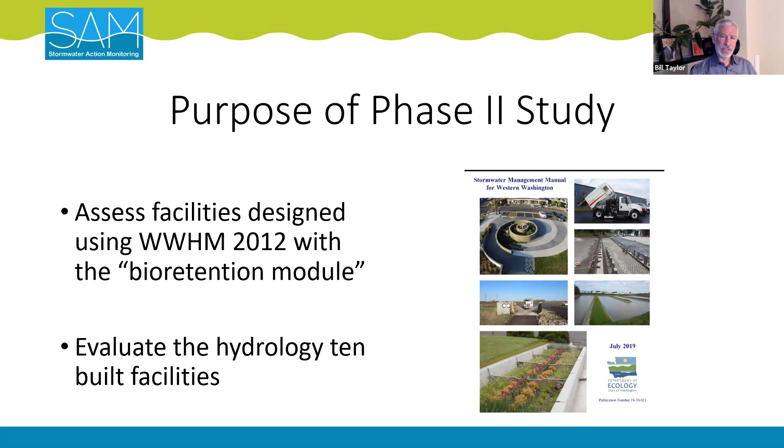The purpose of the Phase Two study is to assess bioretention facilities designed using the Western Washington Hydrology Model of 2012, which includes the bioretention module. We went through a selection process and chose 10 built facilities to measure all of the dimensions and hydrologic conditions in those facilities and compare them to the model. In other words, how well do constructed bioretention facilities perform compared to their design models? And what conditions may be causing differences between actual performance and model performance?

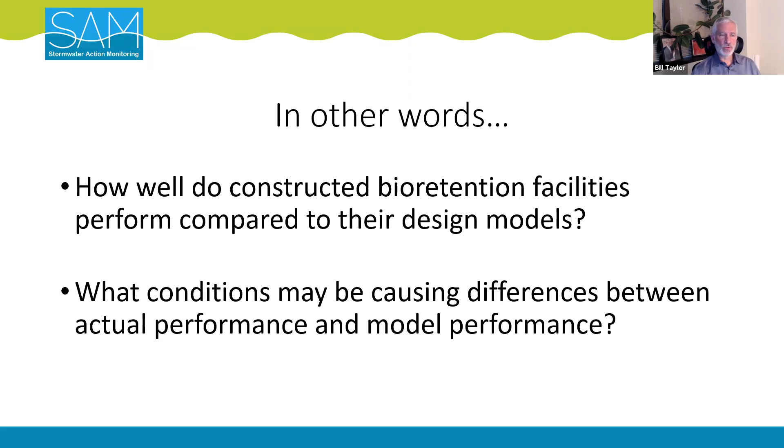In the two phases, there were 10 sites each. In the first set, which by the way was sponsored by the City of Bellingham, those facilities were prior to the use of Western Washington Model 2012, and they're generally a bit older. So they didn't have the benefit of the bioretention module that's in the current version of the Western Washington Hydrology Model. The second 10 were designed using that model, and as a result of being more recently designed, they were quite a bit younger as a group.

Here's a distribution of the sites in this second set, all the way from 2 in Bellingham, 4 in Snohomish County, down into Renton, Tacoma, and outside Olympia in Thurston County. And by the way, that distribution was fairly similar in the first 10. So we have quite a wide range of both climatological and hydrogeologic conditions that we're working across.

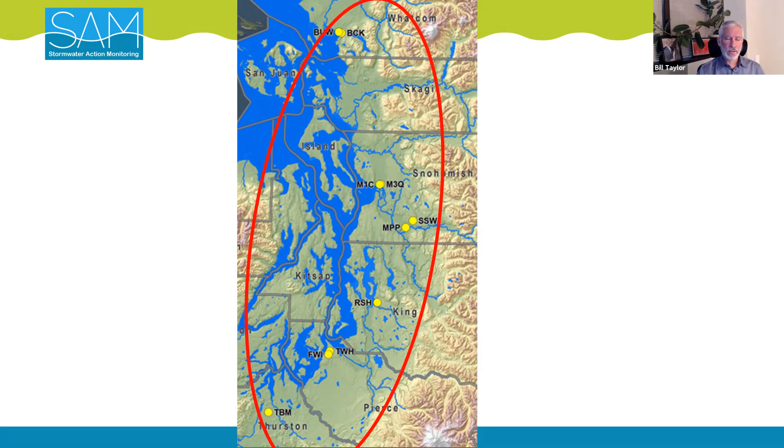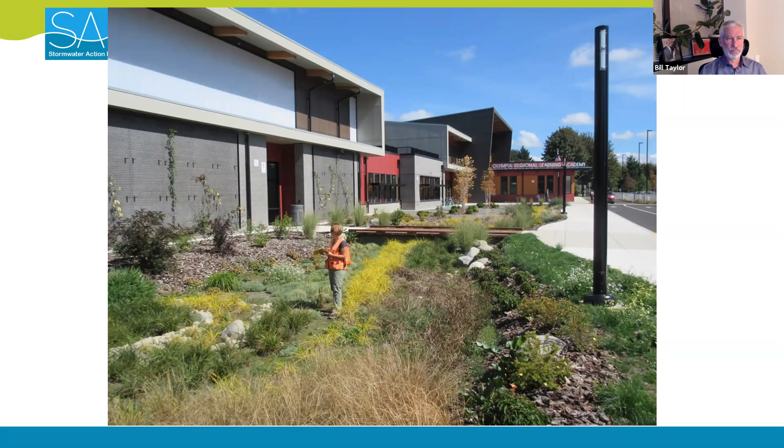I'm going to go through a number of photographs just showing what some of these look like. This is Ann, our landscape architect. Hi, Ann. These first few sites that we'll see are sites from the first 10. And so you can see that they're grown in a bit more. A wide range and selection of plants and different mulching conditions.

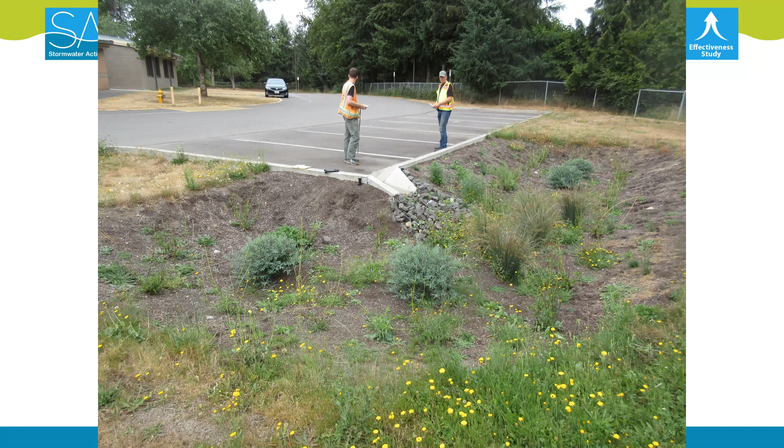Oops. That one looks horrible. I'm having a little trouble with the advance here. I'm not sure what is going on with my cursor. All right, here we go.

So this is another of the current facilities, recently constructed at a school. By the way, schools are a very big user of bioretention facilities. Both in the first 10 that we assessed and the second 10, there were quite a number of facilities fit into the grounds at new public schools.

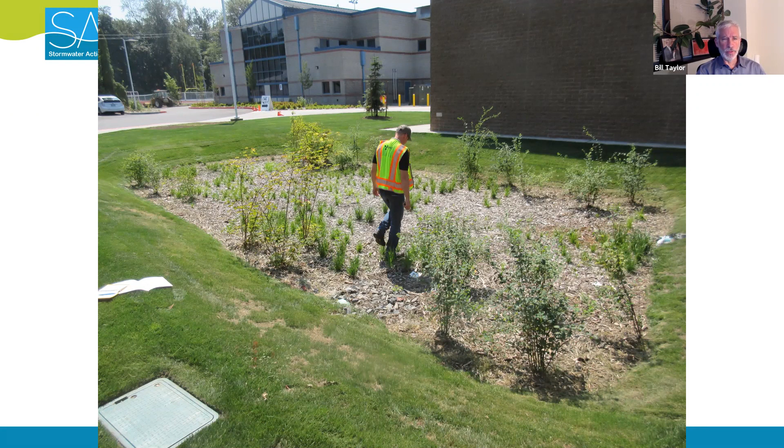Oops, not sure how to better do this. Another one in Monroe. The previous one was, I believe, down outside Tacoma. This is in Monroe. This is also north of Monroe in Snohomish County. We didn't actually select this one, but there's another one behind the building at the same site, and this photo just shows the construction process as they're being built.

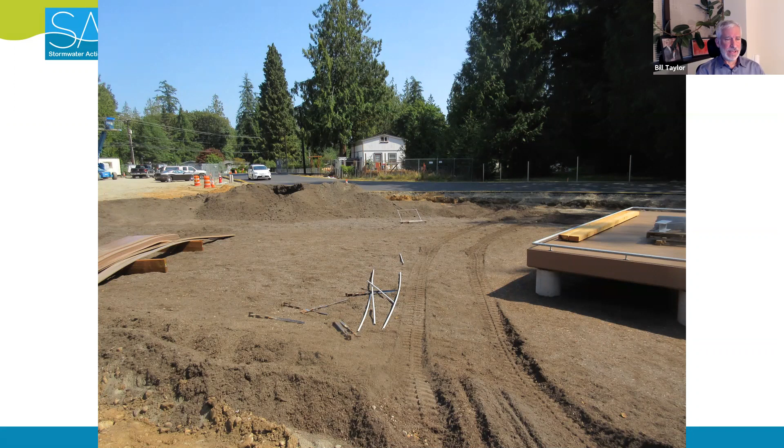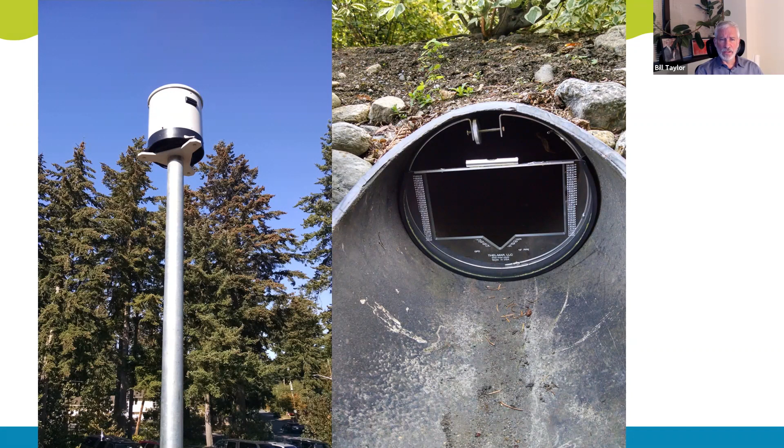Here's an example of the equipment that we're using, a rain gauge, of course, on the left, and compound flow weirs that allow us to measure very low flow rates in the V notch when the flows are low and still get a good signal on the stage, but also allow a higher flow through the rectangular weir when the flows are higher. So that was a very clever way to catch the full range of flows. So we analyzed all of these components for design improvements.

And in the phase 2 site findings, what we found was that 3 of the facilities had smaller bioretention areas than reported, and 6 of the facilities had a small ratio of bioretention area to drainage area.

And when the elevation of the water gets to that point, they're able to measure the entire infiltration area that's active when the water gets to that elevation. So it's a real direct measure of that bioretention area.

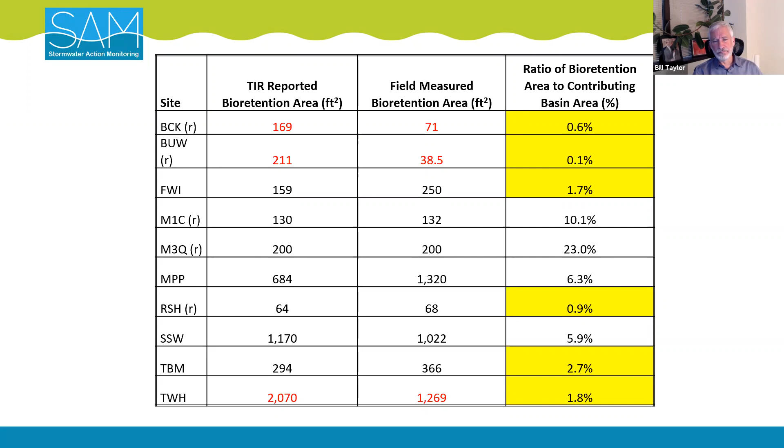Here are the findings from the hydrogeology and geotechnical investigations. Again, the sites covered a wide range of geotechnical and infiltration conditions. The bioretention soil texture was generally coarser than guidelines, both in phase 1 and in phase 2. There's a wide range of infiltration rates, and at times there was little site specific hydrogeologic data, and sometimes borrowed information from other nearby excavations that were not exactly where the cell was going to be constructed.

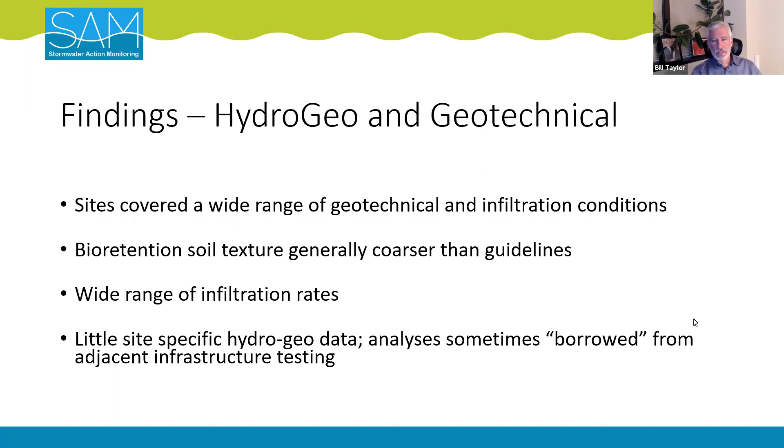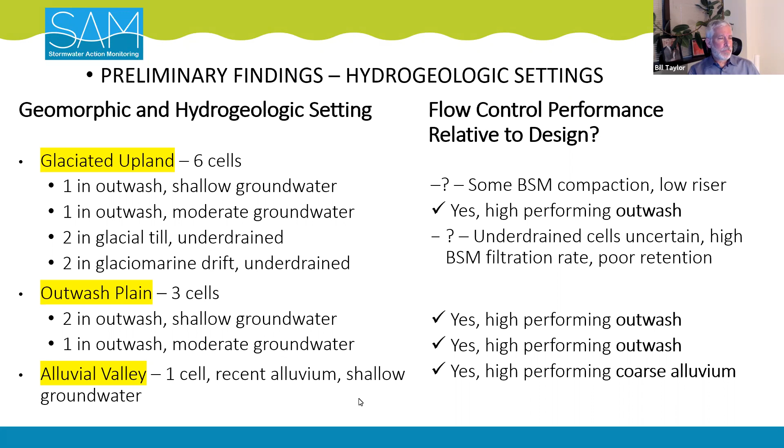And as Jenny has explained to our team, these fine sands and silts are what fill the voids in between the larger particles to help reduce the flow rate and have the biggest effect on infiltration rate through the media. So if you have a lower proportion down in here, that means you have larger potential voids between the media for the water to pass through.

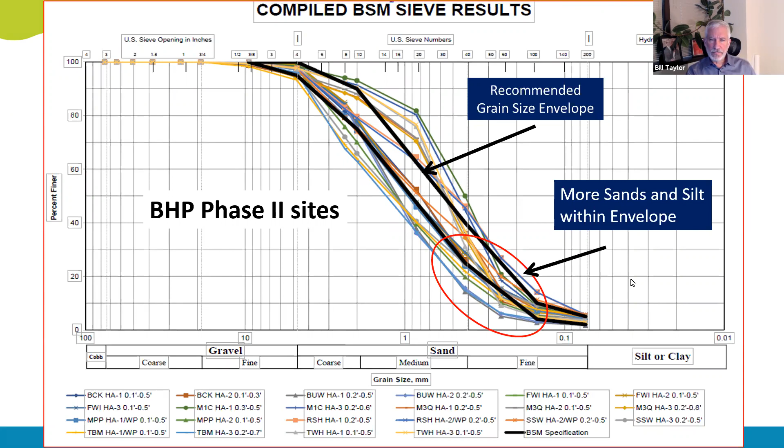In the first set, the older set of facilities, it was pretty consistent that they were all outside this range of the envelope. With the new set, it was a little bit closer. There were a few more in that range, but again, a number of them were outside that sands and silty range.

So for you engineers and other hydrogeologists, this starts to get very conceptual below the ground, but you start to see that there's a little bit of consistency in some of them, but some of them are quite different. That's one of the main findings that we're seeing in the engineers' design reports compared to what we're seeing in the field.

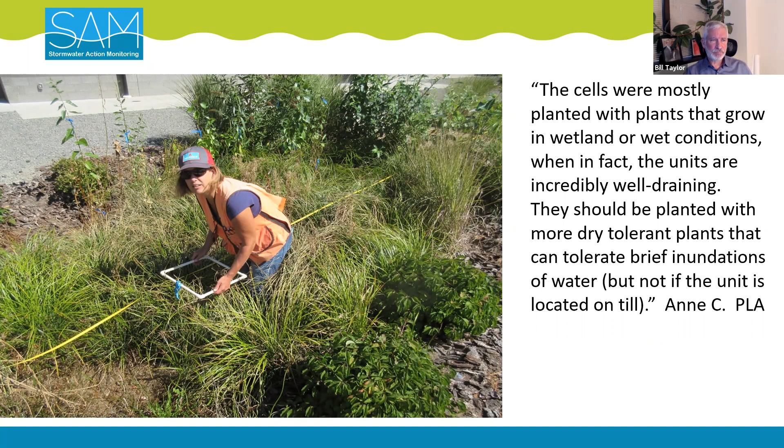In my discussions with some of the facility owners, it's clear that post-construction maintenance of these facilities is their biggest concern. They leave the design of the things to the engineers and the contractors to build it. But then once they move in, they own it, and they have a considerable challenge in maintaining the plant community based on how dry it gets. Never mind the maintenance staff that needs to do it.

So for the vegetation, shrub species were surviving well, the herbaceous species less so because they depend on more irrigation. Their root system is shallower, so they need that near surface water. Selecting fewer, more successful species will lead to greater survival and reduced plant and maintenance costs. And there are recurring issues of plant die-off, invasive species, replanting, and lack of maintenance staff capacity.

One of the other interesting results that we observed, even more so in the second set, is that when the water flows into the facility, because the bioretention soil is so highly infiltrating, a lot of the infiltration happens before it ever progresses across the cell itself. So it's very uneven. And plants that are closer to the inflow will receive more water, and plants farther away will remain drier.

Actually, in one of the other sites that we looked at in the first 10, it had a considerable effect on the infiltration of water through the bioretention soil media and getting to the underdrain quickly, which essentially caused a bypassing of the distribution across all of the soil media.

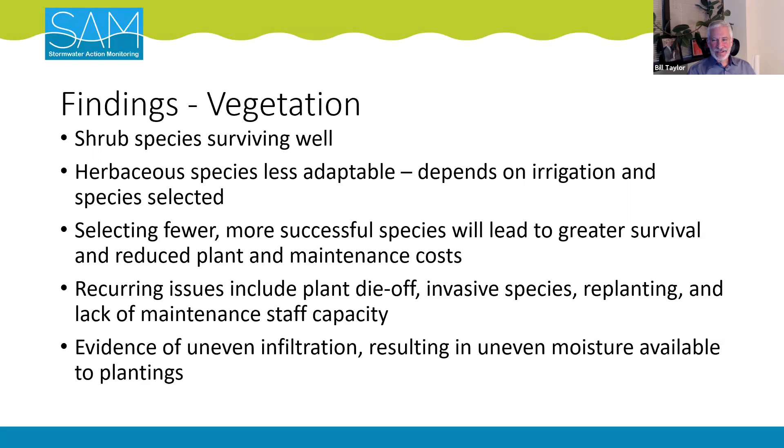Thanks for breaking the ice, Shanti. Sure, happy to help. Okay, oh, I see, interesting. Little detail on Zoom, if you have more than one screen, your scrolling mouse doesn't work unless your cursor is on the screen that you're wanting to scroll.

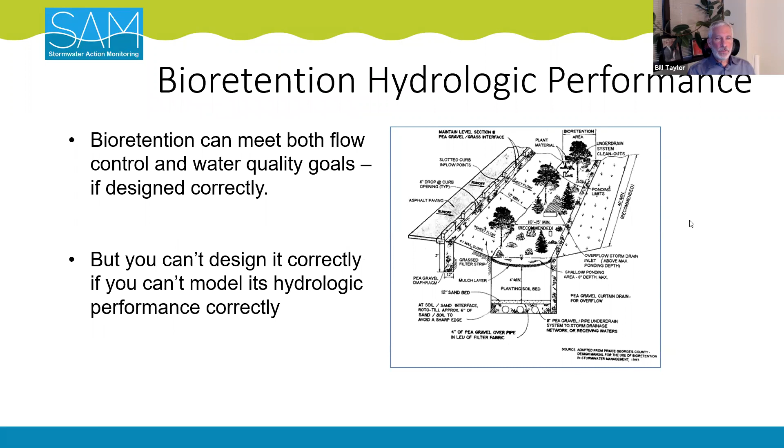So we're getting into Doug's work that he did, and everyone should know Doug. He's the author of the Western Washington Hydrology Model that's used through the Department of Ecology. In the first set, I'm looking at the phase one site designs. In the first set, they did not have the benefit of the bioretention module.

And so they had to essentially design a makeshift trench or some other kind of fake bioretention model in the model. And there were some other models entirely that were used for design, but they didn't have that multi-layer bioretention module that's presently available. The approach to modeling was often not set up properly. And for that first set of facilities, none of which were retrofits, the hydrologic performance of the facilities was more due to oversizing facilities for 100% infiltration, masking any design errors or incorrect assumptions.

So essentially, there was very little observable response that we could see in the range where the facility would start to, for example, fill up considerably or even overflow. I don't believe we had any overflows in the first sets. So the oversizing essentially didn't allow for a lot of response in the facility to evaluate much.

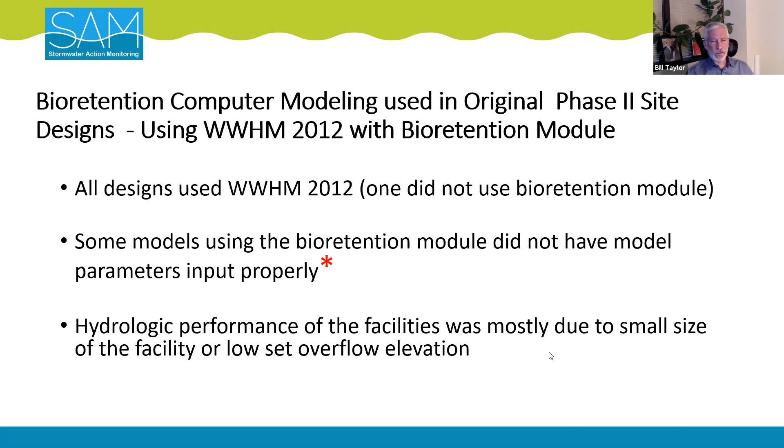So here's for the engineers. We had a request after the first presentation of this in the North Sound permittees group that actually some of the engineers wished they had attended, and they wanted to know more about what the engineers need to be doing better to be more accurate in the modeling. Some of these are pretty obvious, but it just shows that for you permit application reviewers, these are some of the things that you really need to be looking for.

The construction plan should match the design documents, which should match the bioretention model inputs. These are just numeric consistency between the various design documents. The model drainage area and the bioretention areas should match the actual areas. So it's very important to know what your contributing drainage area is, because just to begin with, that's the source of your water. And if you don't have the source of your water right going into the rest of your system, who knows what it's going to do. So just the first steps of the inputs need to be accurate.

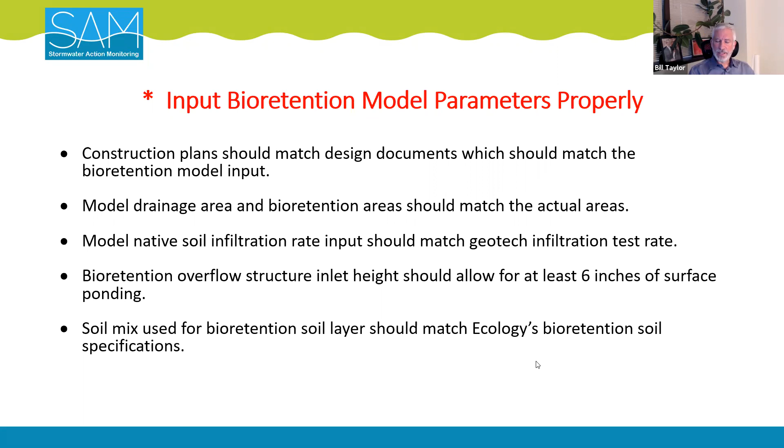In the summary of the model results, WWHM 2012 fairly accurately mimicked what was measured in the field. But Doug recommends adding a vegetative litter when there's going to be some finer material on the surface of the bioretention media, and also to increase evapotranspiration from the bioretention soil mix. So this is getting a little bit into the technical details of the model itself, but it's of interest to the engineers to help model it more accurately.

Recommendations from the BHP Phase Two. Again, maintain a bioretention top area of at least 5% of the drainage area. Maintain a minimum 6-inch riser height. Maintain a minimum of 18-inch bioretention soil mix and meet the size distribution criteria. And specify a planting plan that reflects the relatively dry and well-drained conditions of bioretention facilities.

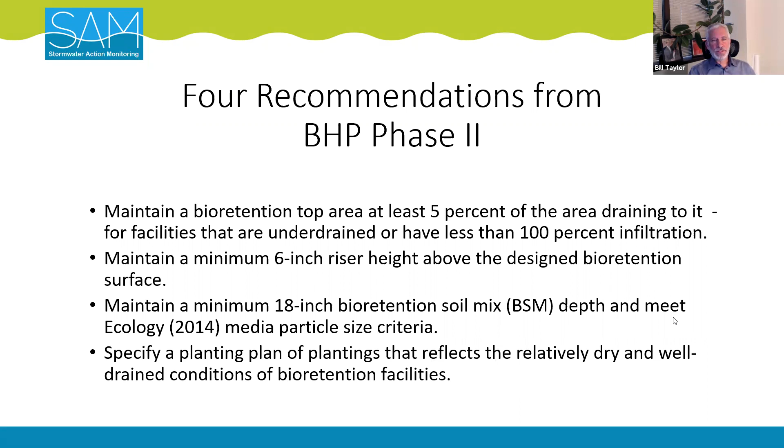So there is our presentation for today, and one of our facilities in the middle of summer with our crew actively collecting the data. So please reflect back on what we've got here and ask us some questions.

Doug, you want to comment more on the model setup? We've been talking about that a little bit between the expected infiltration rates and how it's set up with your new bioretention module. Sure. I think there's a lot of input involved with the modeling of a bioretention facility, and some of it's a bit confusing. So I think it's important that if you're the design engineer or even the reviewer looking at what all this stuff means, there's a lot of documentation available in the WWHM 2012 user manual. So that's a good resource for people when they want to better understand exactly how this whole thing works with bioretention and how to properly set up the model. So that is certainly a good place to start.

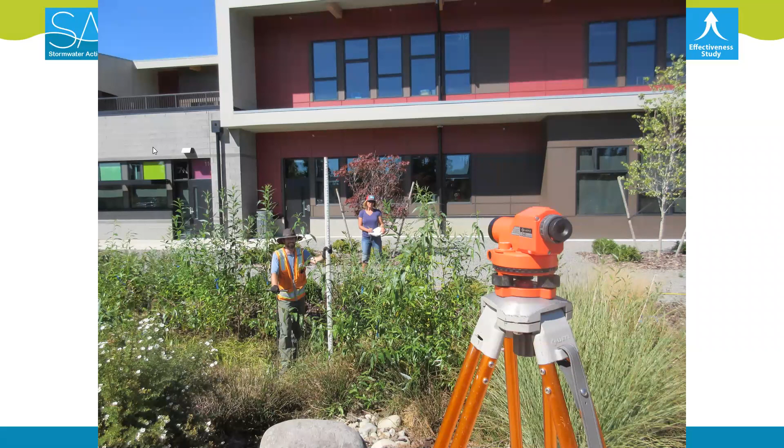Thank you. And I'm seeing a couple of questions. Chris Berg, will you have a successful plant list available? And you want to talk about that for a moment? Yeah, I can talk about that. Unfortunately, we more developed an unsuccessful plant list in reviewing the facilities as opposed to what exactly works. It was easier to say what exactly isn't working. I know that shrubs tend to have a much better survival than a lot of the herbaceous vegetation. I realize shrubs sometimes can be big and cause sightline problems, so they're not a perfect fit for every bioretention unit, but they did measure as having a greater survival compared to a lot of the herbaceous stuff.

And then there's a measurement used for plants when you're doing wetland work, and it's called a wetland indicator status. So for your herbaceous plants, you want to tend towards the drier side, maybe a facultative or a facultative upland rating on the wetland indicator status, as opposed to the obligate rating that many of the plants installed in these facilities have. An obligate rating means essentially they occur 99% of the time in wetlands. So you want to trend towards more of a plant that would only occur maybe 50% of the time in wetlands, which would be a facultative plant. I hope that answered your question.

A couple other things that I've heard you talk about before, and I've heard from the owners, is that some of the more esoteric plants are hard to obtain, never mind whether they'll survive or not. And some of the local jurisdictions take the planting plan as a contract document, that those are the plants that have to be met.